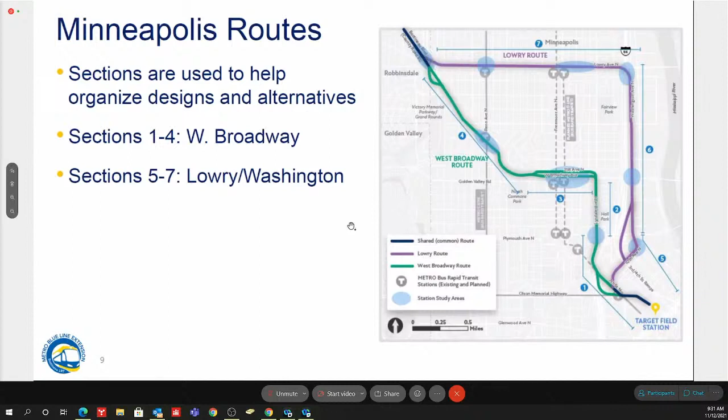Section 6 takes us from that Plymouth Avenue area along Washington Avenue up to Lowry. Section 7 is the segment of Lowry from Washington Avenue again to that intersection of West Broadway near North Memorial. Next slide, please.

Some of the things we're going to highlight in these simplified drawings, which have been slowly updated as we roll them out, is that we've simplified the links from the downtown area. That's the area shown in the yellow box — how we get from Target Field Station to either the West Broadway or Lowry route.

As we've rolled up our sleeves and worked with our project partners, the city, the county, and operationally looked at how things would fit, we've really simplified what used to be a lot of different route options shown in all different colors — kind of a spaghetti arrangement. Now we've refined that quite a bit more with alternatives we feel are viable, showing where the opportunities could be with either of those links.

We are also adding a route option for that section 3 area on West Broadway to incorporate potentially 21st Avenue into the alignment. And we also have options for the connections of Lowry and West Broadway as we connect to County Road 81 near North Memorial.

This is the same map, but has some of the alternatives that we're showing for folks to visualize how we can fit within each one of these routes. So as you can see in each one of the sections, we have a couple options out there, so folks can see if we do one option, how the geometry or alignment can have some challenges, how it may have some property impacts, and then an alternative to that maybe reduces or changes some of those impacts.

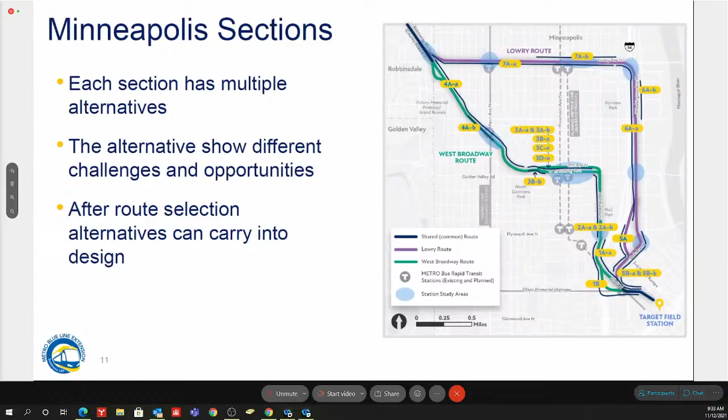We'll look at section 7 today, a couple options we have up in that area, and you can see in the middle, in section 3, there are quite a few alternatives just because of the challenges we have in that area to look at and review. The key here is we're really looking for input on the route alternatives, and we don't need to decide on any of these alternatives shown on each one of the routes, but it will give an idea of how we can move forward. Those can be carried forward with a route alternative as we get further into design.

I'm going to stop here if there's any questions, Chair. Any questions at this point where we are? All right, well, Nick, keep going. Okay, we'll keep going here.

So, Chair, excuse me. Oh, sorry, go ahead, George. George from Robbinsdale had a problem with my mute button there. Nick, can you quick go back to screen 8? I wanted to read one thing completely to make sure I got it right.

The final bullet point, the final recommendation for a community supported alignment, what's the criteria for that, or how does that happen?

Okay, Chair, Council Member Selman, what we're going to do here is the two bullets go hand in hand. So we'll have a draft report rolling out in December that shows all the data, all the input we've been receiving and looking at for both of the route options. It'll really just lay that out. We'll have a 45-day comment period on that, so folks can dive into it, evaluate it, and have comments. Those comments will feed into our final recommendation. So that will be a staff recommendation of the community supported alignment that will have all that information in the backup from the draft report that will move into that. So yeah, really it's a staff supported alignment based on their interpretation of community input.

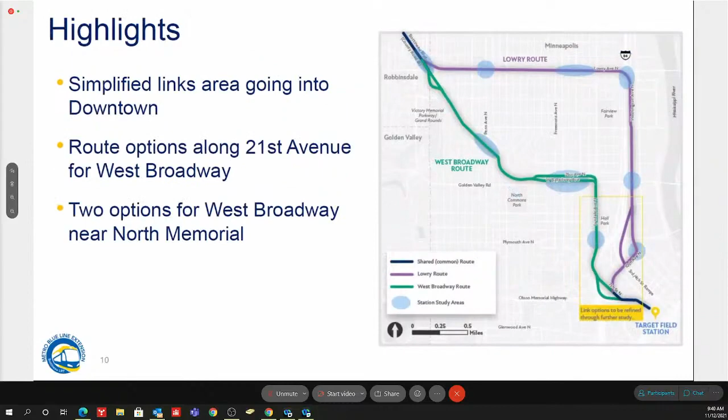And this will get clearer as we get into this presentation. I think it's important to note that even as Nick goes through these different alternatives and subsections, we're not actually designing, we're just showing options to help develop the thinking. And I think that's helpful, to not just have things abstract, but to look at it as it starts getting more real.

Wait, first off, was I right about the environmental review? Can someone speak to what that means? I was not around when that occurred originally, I'm sure others were, but what does the next stage represent? If this stage is about getting to a single line, what does that environmental review and that deeper, graduated stage represent? Because I think that's probably what you're hearing in some of these questions - what are we focusing on in that stage? Can someone speak to that for a couple minutes?

Chair and Commissioner, I think it's a great question, right? Because we've always said that this process is a marathon and we still have some really good work to do. This process of identifying a community supported alignment is sort of the first 5K of that marathon. That next 5K, if you will, is getting us into the environmental process. Not to step all the way back, but we did have a recommended corridor decision here that cleared the federal environmental process on the first route. We still need to go through that process again because of the new alignments.

We know that there are opportunities, and we also know that there are impacts. The environmental process allows us to begin to quantify and articulate what those are in greater detail. So we'll understand, particularly, what are the impacts to air quality, what are the impacts to any environmental or historical structures in the corridor as well, and really be able to understand what this project moves forward.

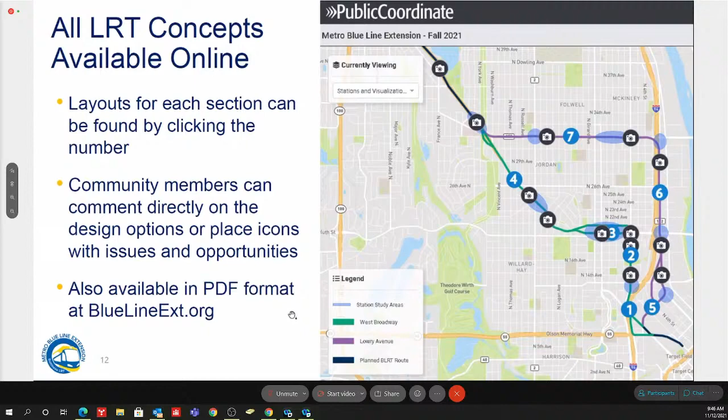Next slide. So along these route options, we're seeking community input. What we're trying to show is some alternatives that show what the potential challenges are with an alternative, and what some of the opportunities are going to be. So really a higher level of looking at, okay, what geometrics, if we change it, how does that change how an alignment fits within each route, and can we adjust station locations, and how does that fit within each route.

We'll have multiple alternatives in each section, so folks can see what those are and evaluate them further as the project advances. We do not need at this time to rule out any of the alternatives shown. Really, they're there to help inform a route selection. So as we select a route going into next year, we will use these alternatives to move forward, to refine the designs and go through that environmental process and work with the community to get community support for this.

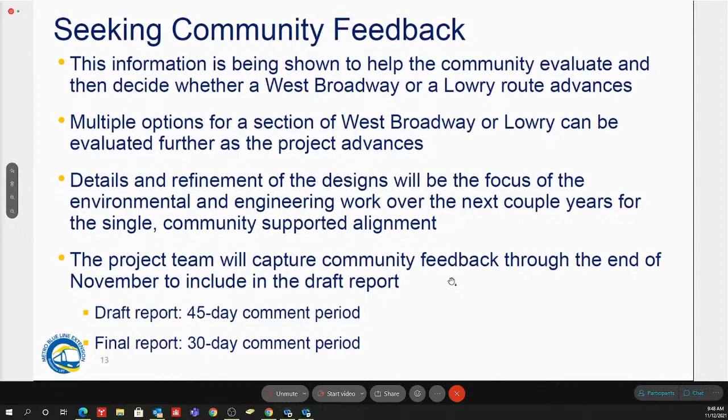Again, the project team will capture all the input we're getting from this website through our in-person meetings. Those will inform the draft report, which will have a 45-day comment period. From the comments we get there, we'll use those to inform the final route recommendation report, which will have a 30-day comment period also, so folks have a chance to pull it up and look at it.

So what I'm going to show here is some information as we dive more into these routes, looking at some of the alternatives. We're going to review a section along Lowry Avenue and a section along West Broadway. In each, we're only showing 2 of the alternatives for time's sake, there is so much information, but we want to show what those opportunities are. For section 7, I'll have 2 alternatives, and in section 3 there are multiple, I think at least 5 or 6 alternatives.

We're only going to walk through 2 of them to see what the differences are. So next slide, please, Sophia.

So as we look at the drawings, there is quite a bit of information on it. We've tried to keep it fairly simple to show how these alternatives will fit within context of the routes.

We'll show the LRT track area in blue. We'll show where potential station platforms are, and alternate station platforms are in yellow. Roadway is shown in a grayish color. Bridges, where we have bridges or structures, are shown in orange.

One of the key things as you look at these maps, we've outlined in a green line where there are publicly owned parcels, so publicly owned properties. That helps in understanding the alternatives and what those impacts are and who's impacted by them.

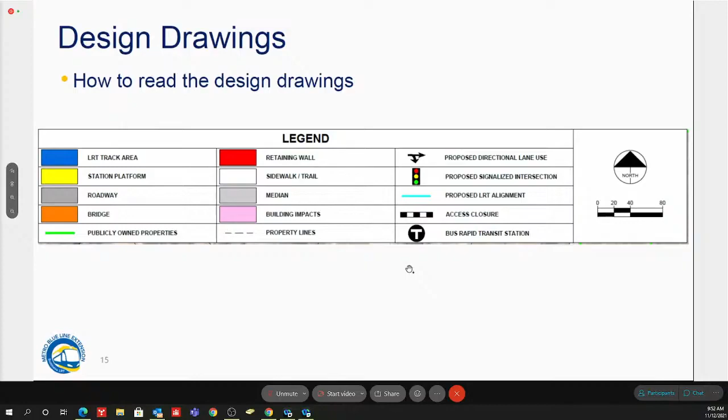Some of our design challenges here: currently there are a lot of unsignalized intersections that go through on Lowry Avenue. With the train in place, obviously if there's a crossing on the tracks, we need to make sure those are signalized. Those signalized intersections will have the potential for impacts on the properties around there, because of turn lanes that are required and needed.

So what we're seeing is mostly residential land use in this area, and we'll show some of those property impacts.

Some of the things we still need to address as we choose a route alternative and get into design: we want to make sure we have adequate pedestrian and bike crossings here. We'll have signalized intersections for traffic, but we need to make sure folks, every few blocks, have the opportunity to get across that alignment. Where those pedestrian crossings go could have further potential impacts on properties along the alignment, but that's kind of a future design thing as we move into next year.

So many of the options that we have here are really focused on geometry adjustments, either moving the road geometry around within that right of way, or changing locations of the stations here.

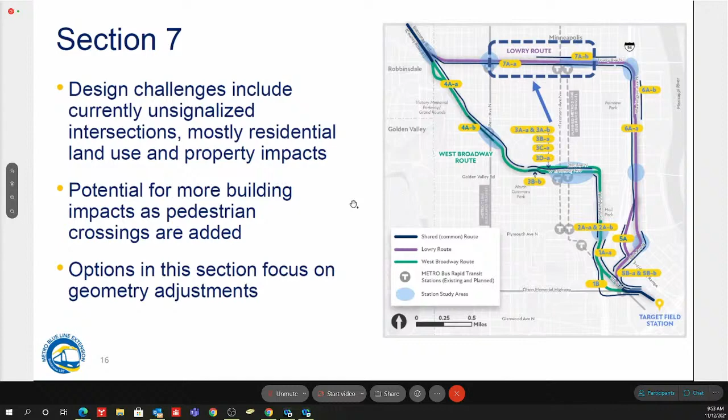So this is why we're going to zoom in quite a bit more. This is just to give everybody a little bit of impact of where we're going to look at along this alignment for those sections, and see how the different alternatives can change how the impacts are along this area.

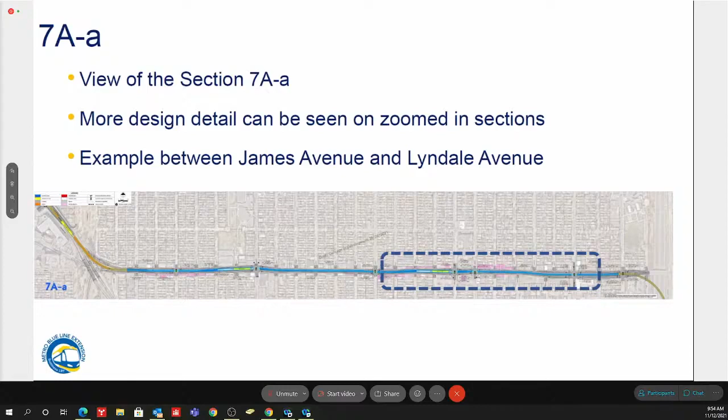So the example we have here is between James Avenue and Lyndale Avenue on Lowry Avenue. Again, a lot of information. If I was to show that map, it's about 8 feet long at a scale that's legible.

So on section 7A, one of the key things to look at here is we're looking at a station location, shown in yellow near Emerson and Fremont, where the D line is coming in. This is a good apparent transit connection area, and why we would look at having a station in this area. The blue line is center-running, at-grade light rail alignment through here.

You can see where we have signalized intersections at James, Emerson, Fremont, and Lyndale through this area. As we get farther into design, after a route is chosen, we'll start looking at how we can get pedestrian crossings in between those signalized intersections. But this shows where that station would go with those signalized intersections, and what the potential impacts would be to some of the properties around here.

That's shown in those pink areas. I think there's probably about 10 to a dozen properties that are impacted in this one. Also, you can see in those green boxes some of the publicly held properties that are in this section of the corridor.

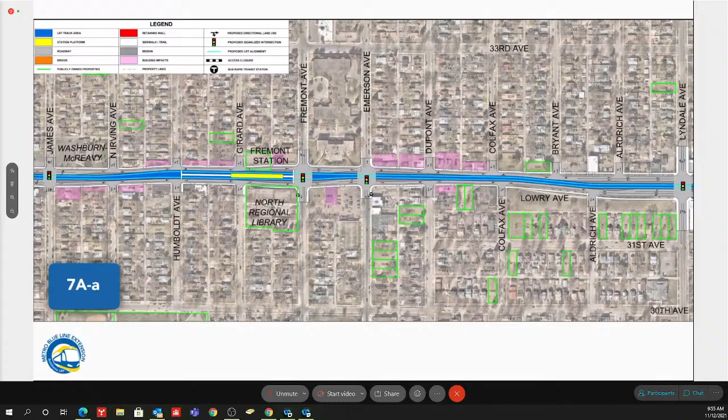Any questions, Chair, before I move on with the alternative? Any questions at this point? Right, okay, so keep going.

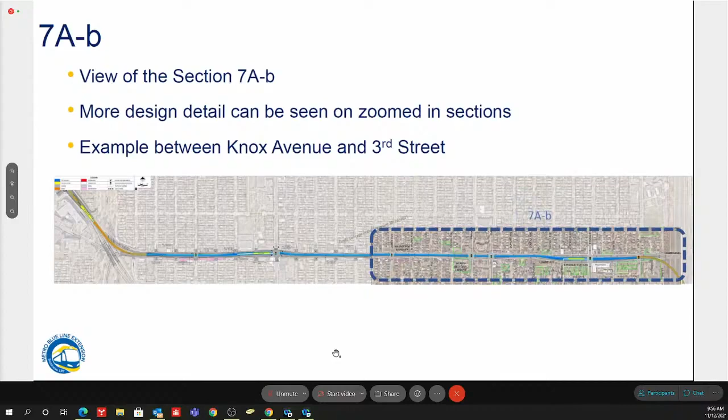So section 7A-b is an alternative to what we just saw. By looking at some of the geometry options that we'd have, moving the station location, we have a chance to mitigate or change what some of those impacts would be, and what the challenges would be with the design, and show some different opportunities.

So this slide here focuses more on that same area near Emerson Fremont. What you can barely see, and the next image will show, is moving the station down towards Lyndale Avenue. So we're moving it farther away from where that connection would be at Emerson Fremont to the D line, but taking it over to Lyndale Avenue, where there are also opportunities for connections through here.

So with the station in this location near Lyndale Avenue, along Lowry, there is quite a bit of right of way in this area shown by that station. So by putting the station here, we have less impacts to private property through this area, and we could get a station in at Lyndale that fits very well.

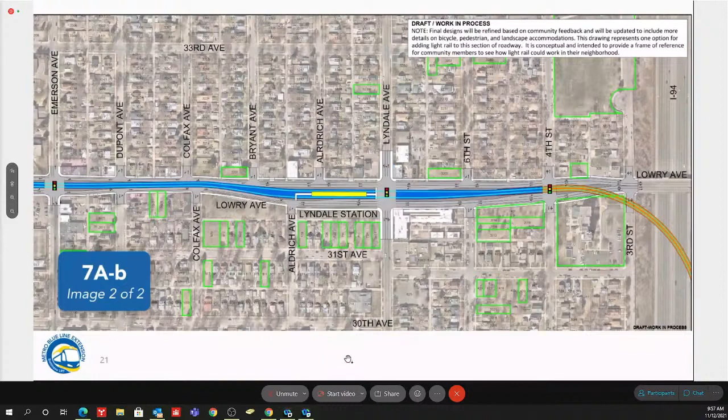Can we go back to the first slide, please? One of two. So what is shown here is where we had that 10 to a dozen property impacts because of the station location and signals in here. By moving that station down, it gives us an opportunity to mitigate or not have those impacts out here.

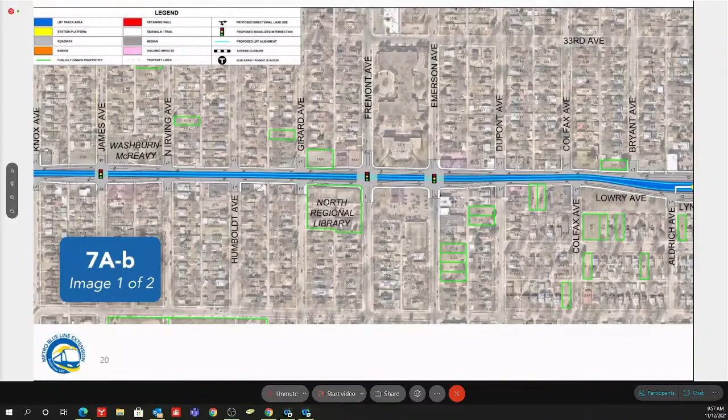So this is an example of those geometric alternatives that we have out there, and how we can adjust for impacts with some different design. Those are the two options or two alternatives that we're showing for section 7 up on Lowry Avenue.

We want to move forward here to section 3, which is an area that's very challenging along West Broadway. Again, as shown on that map or graphic in yellow, there are multiple, at least a half dozen, design alternatives we have in that area to look at how geometric and operational adjustments could change how light rail and traffic could fit along West Broadway.

So we've got many design concepts here, and what we're really trying to do is avoid those property impacts, specifically building impacts along the alignment.

Our design challenges here include how the roadway lays out, the curves, and a lot of necessary turn lanes that will go in with the signalized intersections. I believe all of our alternatives keep all the existing signalized intersections that are there. Our alternatives really focus on geometry changes, as well as roadway and LRT operational adjustments.

So this is where we'll start talking about: okay, if we put everything on West Broadway, how does it fit? What are those impacts? And then what are our alternatives? Can we do something else with that operational adjustment? Can we bring 21st Avenue into the design as an option for either roadway, LRT, or both to help us out with some of those impacts and minimize them?

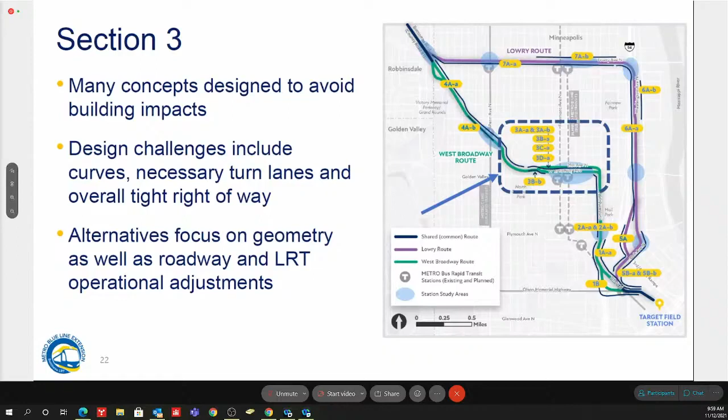Next slide, please. Because of the complexity of these drawings, we've put together some more line drawing schematics just to show people schematically how traffic could operate with each one of these section alternatives out here.

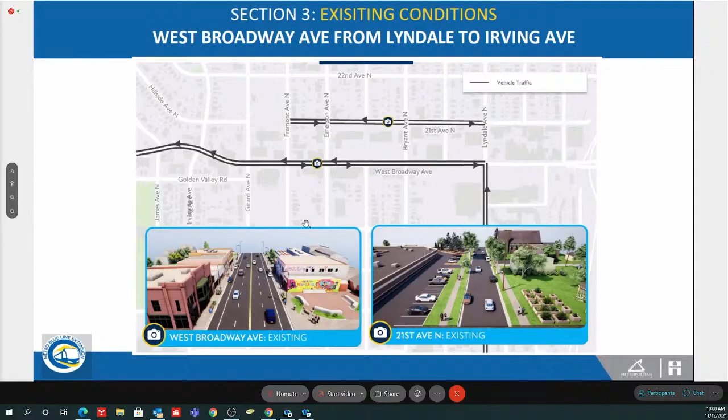So what I'm showing you here is a graphic that shows the existing conditions on both West Broadway and 21st Avenue. There's a lane of traffic in each direction on both streets. We also have existing concepts showing how it looks out there today. West Broadway has one lane in each direction, with that existing graphic at Emerson and West Broadway. On the right-hand side is 21st Avenue, a 2-lane street that goes just a block north of West Broadway.

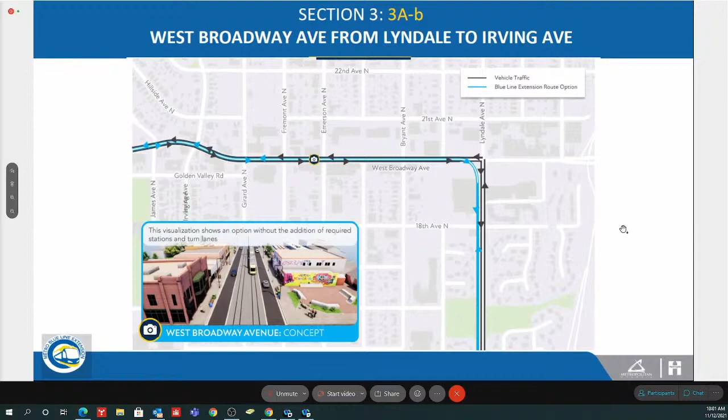So section 3A-B is an example. Again, we showed 2 examples on section 7, and we'll just show 2 examples of section 3 for time's sake, although there are quite a few and those are available online. This section 3A-B shows if we were to come up Lyndale Avenue and keep a lane of traffic in each direction on West Broadway, as well as have bidirectional light rail on West Broadway, how it would look. The glimpse shows a mid-block view of how it would fit with a lane of traffic on either side, the guideway at grade running along there, and sidewalks on the outside. If we didn't have to have stations or signalized intersections, things fit very well.

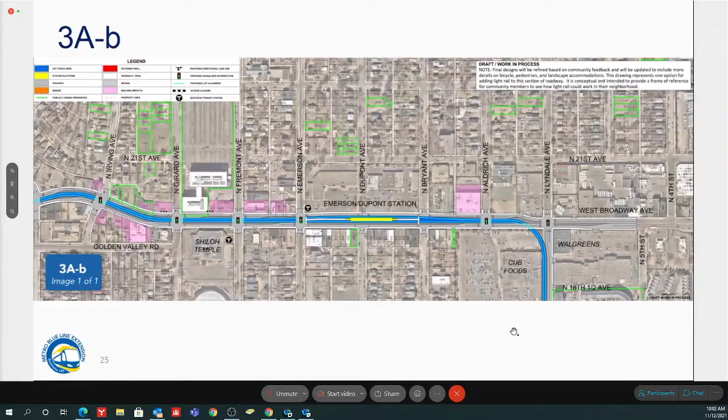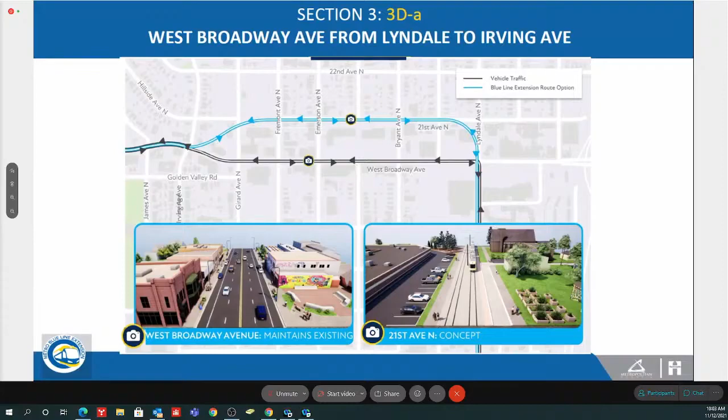So section 3, alternative 3DA, is just one example of how we could incorporate 21st Avenue and how it would work operationally with operations on West Broadway. In this section, we keep both lanes of traffic on West Broadway and move the light rail up to 21st Avenue, so both directions of light rail would be on 21st Avenue. The photos on the bottom show how that would work with West Broadway, which would remain looking like it does now, with traffic going both directions through there. On 21st, light rail would run down the street, and there are some alleys and connections there that we'd want to maintain so we can keep traffic from the alleys flowing around that area.

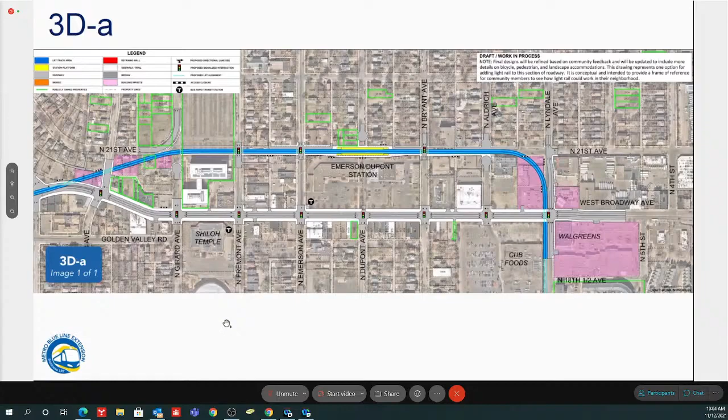This is the alternative graphic that we put together. You can see that there are still impacts to some buildings and properties through here with this alignment, but we were able to minimize a lot of the impacts that were shown on West Broadway with this alignment. What we're showing here in gray on West Broadway is maintaining those traffic lanes and pedestrian connections, but moving the light rail up with a station centered between Emerson and Bryant Avenue. As we move farther west, that alignment would come behind the Minneapolis Public School building, then diagonally come through the block between Irving and Girard and connect back up with West Broadway in this area.

So quite a bit of information I just went through. This is just kind of the tip of the iceberg of what we have. Any questions on this information, Chair? That's a lot of material, and I know we're not going to get into every little thing, but that really gives us a flavor of the detail that you're approaching. Any questions for Nick or the team?

Hi, this is Nicole Bueller from the Blue Line Coalition. Hi, Nicole, go ahead. Thank you. So you mentioned that you'd be reaching out to the folks who have properties or buildings that could be impacted, shaded in pink. What's the timeline for that?

Chair Nicole, that is actually happening right now. A lot of it is Sophia and her team have been going out, knocking on doors, leaving flyers, meeting with a lot of those businesses and properties along the alignment.

So that has been happening, and will continue to move forward here. Well, and I thank you for that work, but I have a property. My house is shaded in pink, actually, and I have not been contacted by anyone. So thank you. Yeah, I don't know. Is there like a block by block strategy, and I'm just still on the list of people to get to?